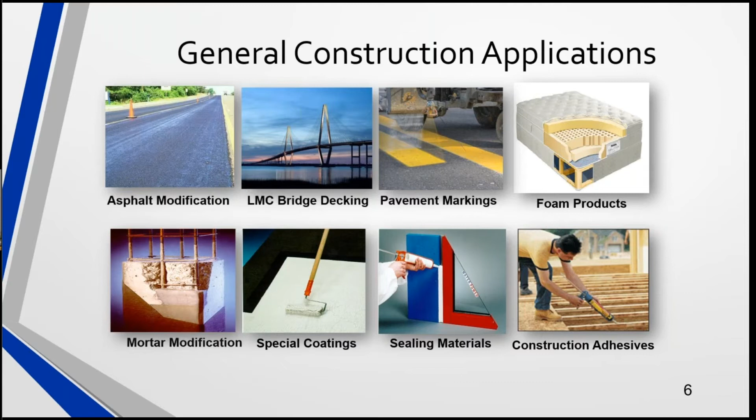When I look at asphalt applications, you've heard a lot of this already. And so again, to all the folks who are on today, I thoroughly enjoyed being on the tail end of this, getting to hear, as you heard Chris Lubbers start off, all the different functions of this. And again, to the folks at the Pavement Preservation Group, excellent job on putting this together.

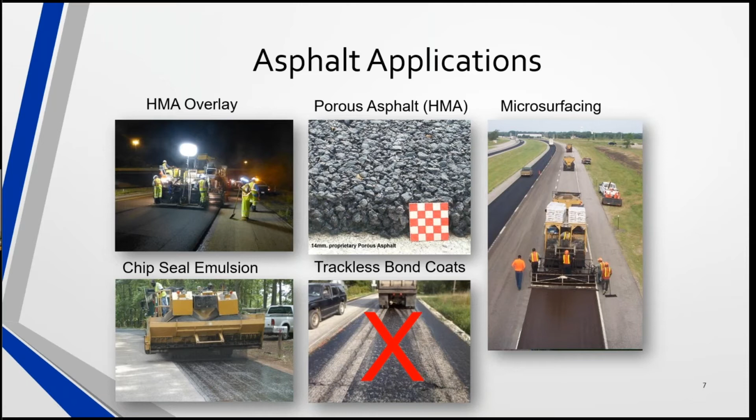Whether I look at the HMA overlay and the tack that's under it, or a porous asphalt mix where I use the emulsion to fill it from the bottom. Maybe I'm looking at chip seal emulsions, as you see in the lower left-hand corner. Over on the far right, you see a microsurfacing application. Or at the bottom, we look at a bond coat. Oh, what happened there? Well, we got a big red X through that one. All too often, we see this type of work, and we're going to talk about why that happens, and things that we've done to try to work around that.

As an overview, again, this process is dictated. The emulsion is dictated by application, from my sampling to the testing that it's got to go through, but even the type of emulsion and what it's got to do, it's all by application.

Keeping in mind that it's all about surface area. If I'm dealing with a chip seal, where I'm dealing with one size rock, I need something that's going to set pretty rapidly, in my opinion, because I don't have a lot of reactivity. If I go to something that has a lot of fines in it, now I'm going to need something that's going to set a little bit slower, because my emulsion will react to those fines, and it speeds up the process. You've heard about how emulsions will react in different ways.

All that being said, there's things that can speed it up and slow it down, but when the water's gone, the absolute process is done. And we call that, a lot of times, we're looking at tack just breaking, or when the emulsion cures. Emulsions, to me, are one of the most misunderstood products in the market.

Just like if I'm in an asphalt laboratory, people say, well, what's your entry-level job? Well, in a mixture lab, it's shaking rock, and it's like, oh, I don't want to do that. In a binder lab, sometimes the entry-level job could be working on the emulsion side. And we tend to put emulsions over in this box, or at least I did at the cabinet or the DOT, and we put it in this box that it's almost a throwaway product. And it's sort of the low man on the totem pole gets it, because we always associated the smells and things like that with it.

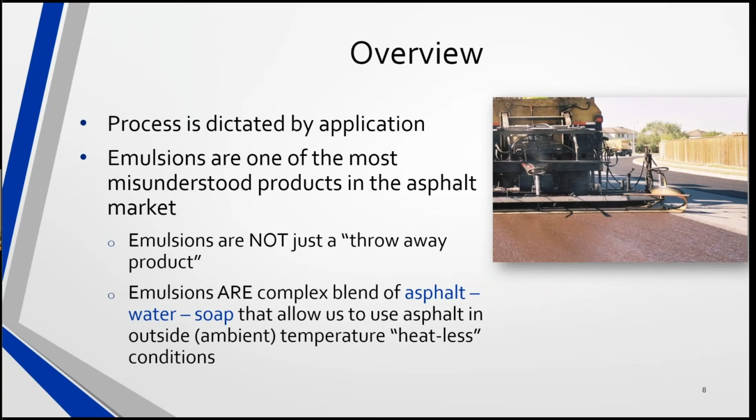I know we're talking about we've got to keep the emulsions warm and so on, but we're not dealing with temperatures of 300 degrees, 250 degrees, and so on. We're dealing with much lower temperatures. Emulsions are a complicated product, and that's why I think they're so misunderstood. As engineers, we want to go and we want to specify and we want to put everything in our engineering world, but when we get to the emulsion, we just don't understand it, and it frustrates engineers to no end when we have to rely on a manufacturer.

Most agency folks are engineers who are trying to specify these products. They are not chemists. I am not a chemist, and we have to rely on the chemist. And these are just good areas where we need to work together. No different than a DOT managing a major asset needs to work with somebody who has a good business head, MBA head, to understand how to manage assets. Engineers are trained through schooling to build. We're not trained to be chemists. So listen to the manufacturer.

The other thing that the manufacturer will tell you is application, application, application. Whether you're dealing with a tack or a bond coat, a slurry seal, microsurfacing, CIR, it's all different. And again, water can release quickly in a slurry, but more time may be needed in a thicker application. It depends on the reaction, depends on the reactivity that goes on.

Environment is another one that can really frustrate an engineer. I've seen projects that go down in one area of the U.S., and so many of my peers would say, boy, it worked here, let's go here. Now we go down to Houston. Houston could be a really humid environment, as we know. And all of a sudden, what worked in Colorado doesn't work in Houston. Why is that? It could be the time of year. It can be the temperature. Probably has a lot to do with humidity.

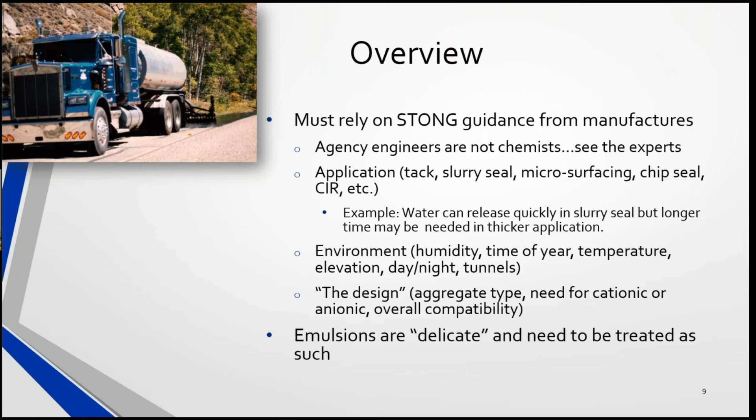Not that we should shy away from them, but again, the more we understand how to use them, the greater that we can use these products and not just think of it as some road oil, as we tend to call it. Handling do's and don'ts. Again, thank you to the folks over at Heartland and then General Industry for these. Some of these I can work on, and a lot of these I have to use, and I remember through the years.

Do's, you can dilute emulsions by adding the warm water to the emulsion. There's some don'ts that's going to come along with this. Be careful about diluting these emulsions. Keep track of what you're doing. I know I've gotten out to jobs before, and the residue that's left on the pavement after a contractor has diluted it once and diluted it again and diluted it even a 3rd time.

You know, I used to joke that I grew up very poor in Eastern Kentucky, and we used to joke about my mother. She would dilute the Kool-Aid and call it Kool-Aid Light.

In this case, diluting your emulsion to the point of where there's very little asphalt left in it does not do good. Why do we even dilute it? Well, we're trying to help with the sprayability or the spread of that emulsion over the roadway. You absolutely want to check compatibility of water and emulsion. Do it in a flask, or I love the other comment, put it in a Gatorade bottle, right? Keep hydrated out there. Check it. Understand the compatibility of the water and the emulsion in the flask before you do it on a whole load and cause something bad to go wrong.

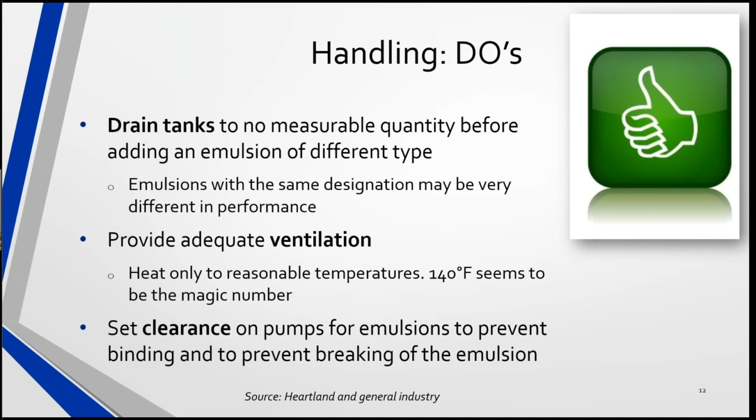To prevent them from binding or breaking the emulsion. Again, a pump is generating heat, imparting a lot of energy into that product. As you've heard it already mentioned, we want to circulate. We want to be gentle with the product. Clearing those valves and lines of an emulsion.

As we go to think about long-term storage, I want to make sure that my pumps and everything is clear of the emulsion, because any water or anything during freezing weather is going to be damaging to your pumps. Drain pumps, remove the plugs when not in service. Warm pump casings. These are some very practical things to ease the startup. No different if I'm using hot asphalt, right? As I begin to restart things, warm things back up.

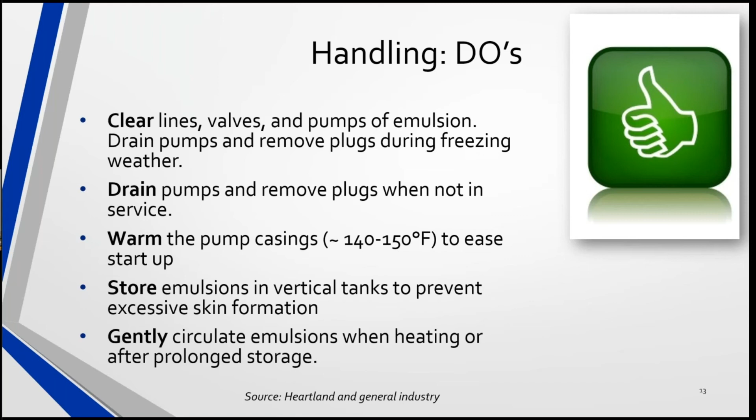Emulsions, while we use a lot of horizontal tanks, the best, even for emulsions or for hot asphalt, is always to use vertical tanks and not horizontal. In this case, it's less of a surface, and that way we don't have excessive skin formation, that film or skin that forms on the top. Gently, and the term here is gently, circulate emulsions when heating or after prolonged storage, not aggressively, but gently.

A few don'ts, and we've already talked about these in sort of the one way, but let's talk about them now on the don't side. The tight clearance: as we get our pumps and we have such a tight clearance, we don't want to cause a seizing issue. We do not want to leave the emulsions in line during freezing weather or hold the emulsion in the lines for extended periods. We do not want to apply severe heat to pump casings.

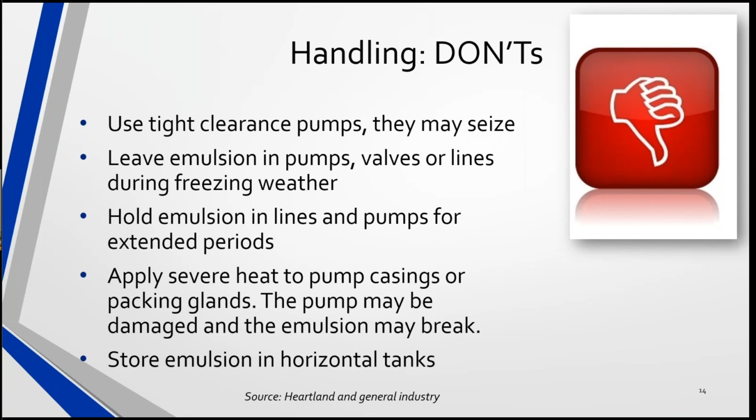If you apply a lot of heat to those casings, what can happen? Well, one, you could damage your pump, but also you can cause your emulsion to break quicker than what you want, and now we're causing something to seize, and we don't want that. Again, we don't want to store emulsion in a horizontal tank. I think of my bottle of water here. If I turn it on its side, I have a lot of surface area on the top as compared to what I have if I put it in a vertical tank. So where possible, store the emulsion in a vertical tank.

We talked about circulating earlier. One of the do's is to do it gently. Doing it excessively, we can lose viscosity when pumped over and over and over. Earlier, Andrew was talking about the plates and how the plates go together. The viscosity is controlled by those plates and how they work together, getting particle size and so on. All of that work and the size and the spacing on the plates goes into making that emulsion. We don't want to get it on the back end and destroy what's been made by circulating it excessively. Again, circulate it, pump it gently.

We do not want to dilute a rapid setting emulsion with water. Just don't do that, right? Don't dilute emulsions with non-potable water or cold water. Let's talk about that. So I go get water out of a creek, or you go get it out of a dirty pit somewhere. Now we have water that didn't come from a fire hydrant; it came from something that's non-potable. So what happens when I dilute it with non-potable water? I can contaminate my emulsion and cause it to do things I don't want it to do. I don't want to do anything that messes up the chemistry that's been created for me.

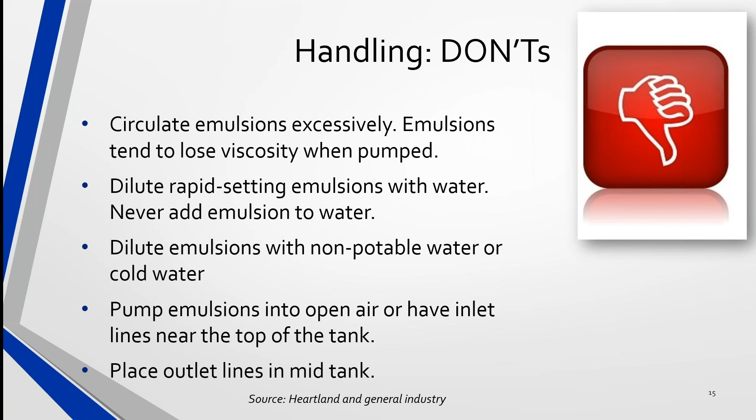We talked earlier about what happens if I mix one emulsion and another emulsion. Especially cationic and anionic, two very different emulsions can coagulate. But even emulsions from the same manufacturer, you get it a month later, check with your manufacturer to make sure it's identical if you've got a half tank and you're adding to it, so that you don't get into a compatibility issue.

When in doubt, use your flask. Mix it in a bucket before you ever put it into a larger tank. A bucket, a flask, a Gatorade bottle is my favorite. Don't subject emulsion to the open air or let it be near open flame. Oxidants. Do not heat the emulsion above 190.

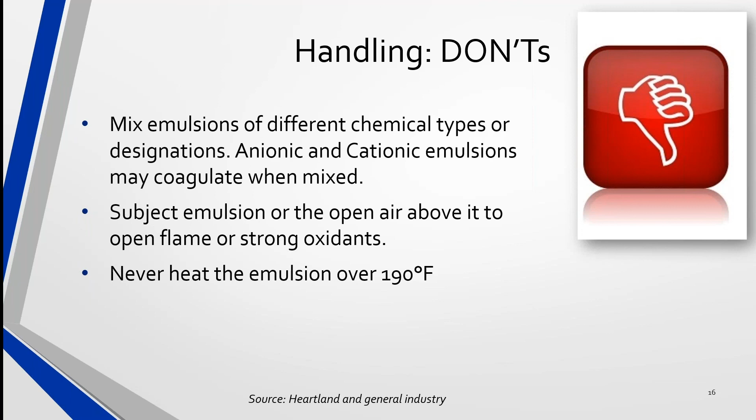That number may even be lower by some manufacturers. 190 is sort of the higher number that I've seen. We don't want it to break quickly, but we don't want it to break down, or we don't want it to also do any premature aging.

And then now if I go to put a mixture over that, what's going to happen is you may get some ponding in one area and a little bubble that comes up through. Now, I have never seen that do anything other than just be a fat spot on the surface, which is not always what you want to see, but I've never seen it be detrimental other than what you could use a scraper and remove it with.

Concerning the application, the better that we can spread the emulsion, the better assumptions that we can have on our pavement design that the structure can do what it's supposed to do. No different than the analogy where you take 4 or 5 2x4s and put somebody on them and let them stand, as compared to taking those 2x4s and running a bolt through them or gluing them or laminating them and now putting somebody up there. You're eliminating the sliding action that would go on, and your structure's better.

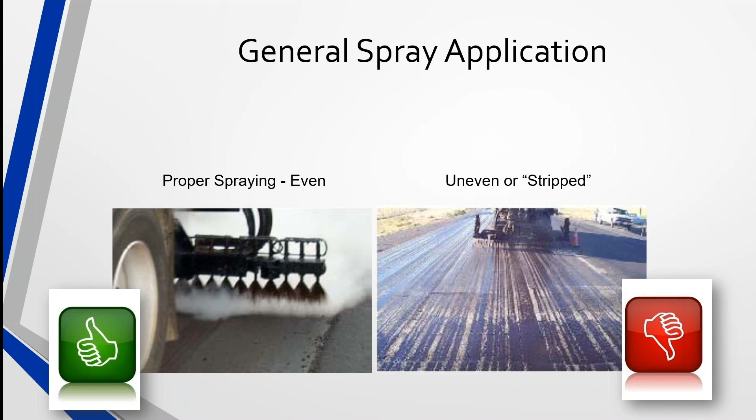And it starts right here on this picture in trying to do it right with the proper spraying versus very uneven areas. I would add a third picture that's not in here: if you can't tell the emulsion or the tack has been sprayed, then you have a very serious issue, and you need to go back and respray. As an inspector watching this, don't ever hesitate to go back and have them spray. A lot of times emulsions in these applications are incidentals, and they're not even a pay item. So make sure that we get that put down correctly.

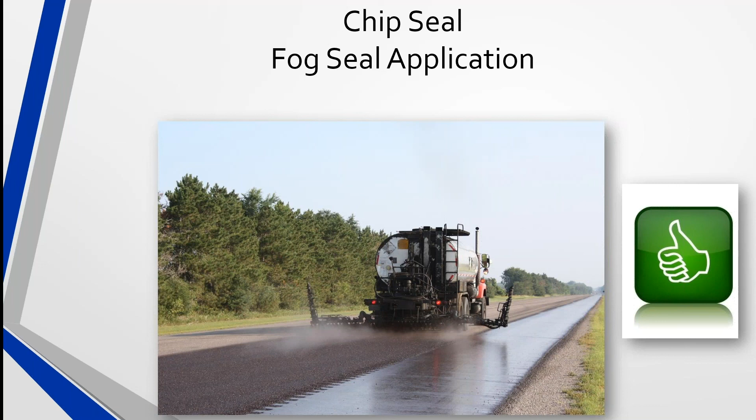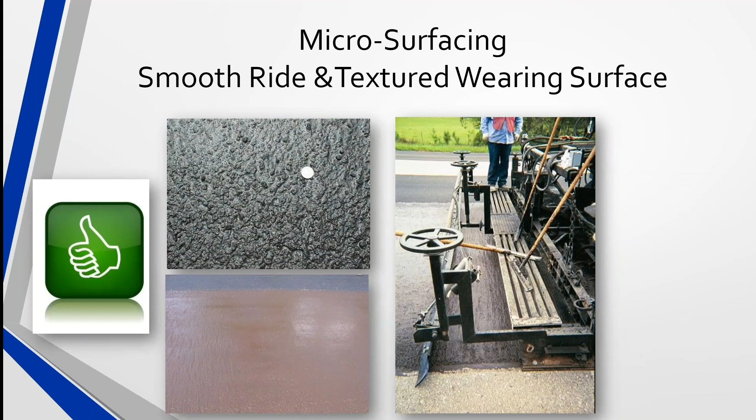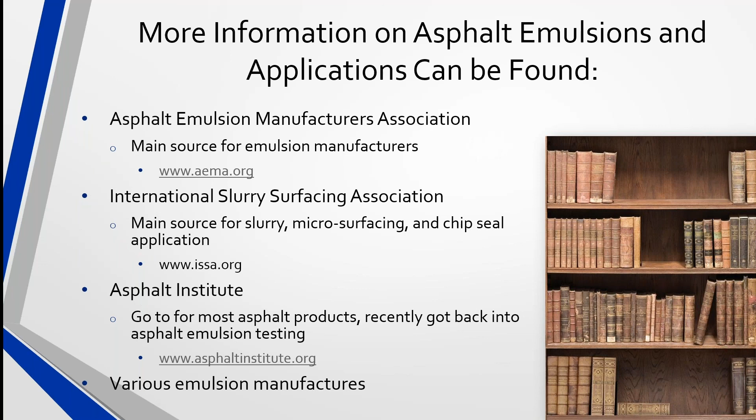This slide is information on what I use as good sources of information: ISSA, AEMA, and Asphalt Institute, and of course the various emulsion manufacturers.